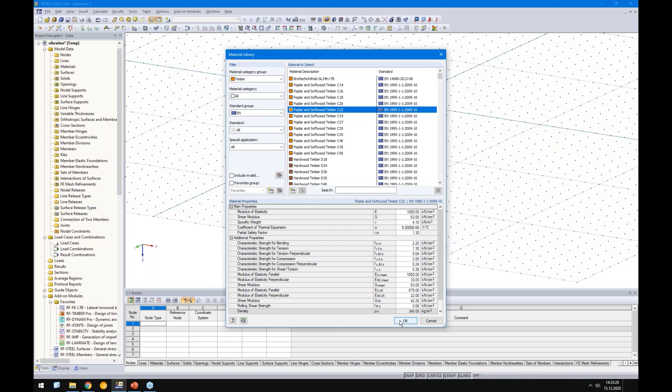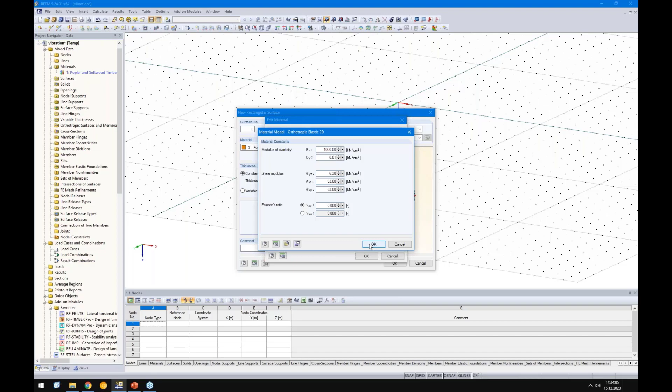I click OK. The height of the timber is 200 millimeters and the concrete is 100 millimeters. So I enter 200 millimeters, and of course it's an orthotropic surface, otherwise I will get an error message during the analysis. You see we have the X direction with a strong E modulus and the weak one in Y direction. We can directly set it to 0 because in the hand calculation no stiffness was considered from the timber. There's a tiny stiffness, but not much.

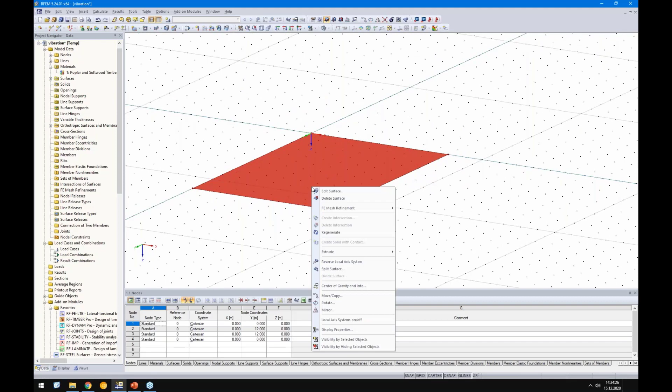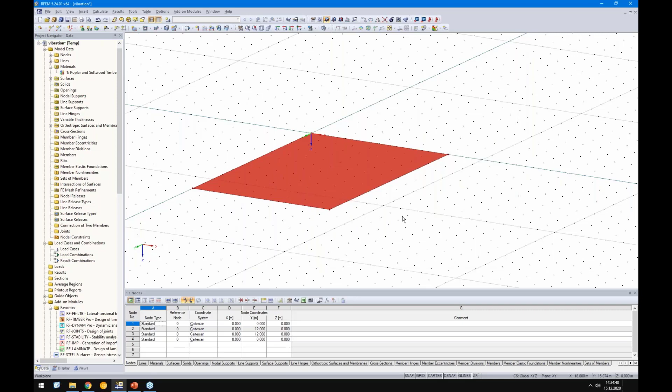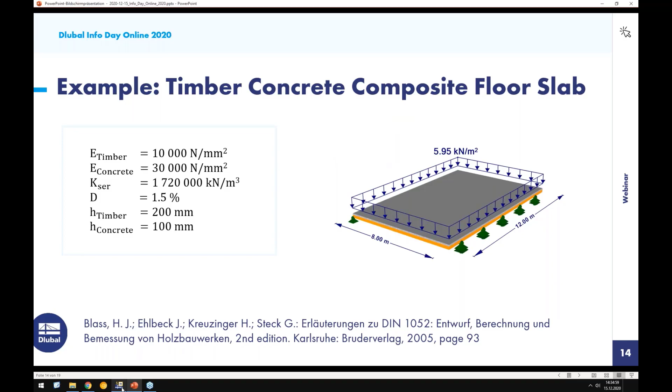It has 8 by 12 meters. Let's double check, 12 meters and 8 meters. Then I will copy this surface and create the concrete. The thickness was 20 centimeters and 10 centimeters, so we need to lift up the concrete surface by 0.15 meters from center to center. We need a new material here. They used 30,000 newtons per square millimeter, so we use a concrete with about 30,000, a C20/25. But it has only 100 millimeters, so we switch this to 100 millimeters.

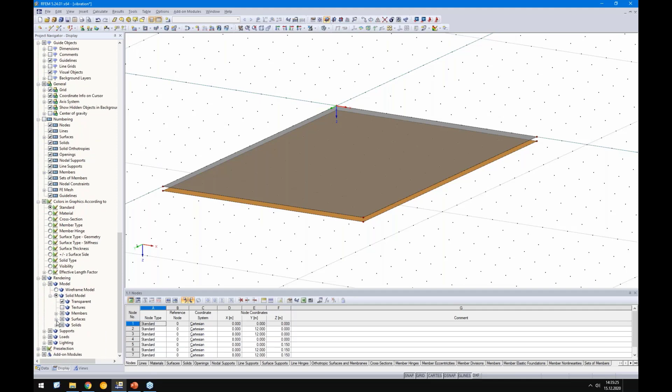Afterwards, let's check if everything is correct. We activate the thickness for the surfaces, and when we zoom in, we see the concrete from here till here, and the timber from here till here, which looks fine. Now we need to connect the concrete slab with the timber slab. I will show the possibilities on two examples; we have two ways to do this.

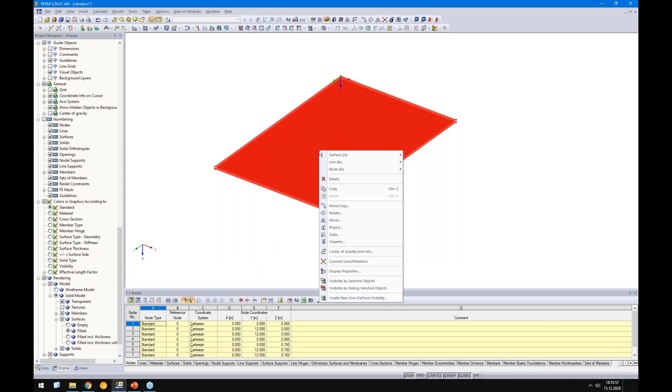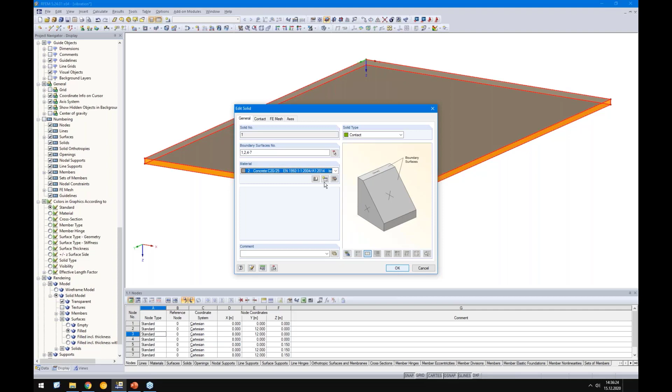The first way, I start with a contact solid. I select these two surfaces and say create solid with contact. You see directly we get some boundary surfaces. These have zero stiffness because they get the stiffness from the contact solid. We will define this contact solid and select the contact surfaces, surface 1 and surface 2.

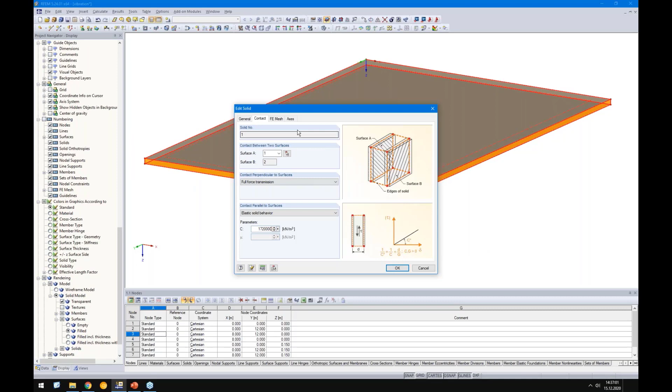Perpendicular to the surface, we want full force transmission, and parallel to the layers we want elastic behavior, and the spring was 1,720 meganewton per cubic meter, which we enter here. We are in kilonewton, so I add three zeros. Let's double check: on top we have the concrete, maybe better to select standard here, and on the bottom side we have the timber. Good so far.

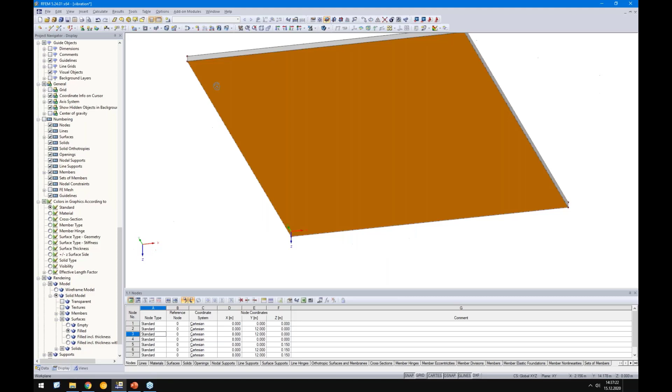We will support the slab. It's simply supported on this side and on this side. In X direction, I will also consider a tiny spring to keep it stable, otherwise there is no support in the XY plane, and with the springs I fix it. I fix this structure, but since we do not use any load in XY plane, we'll use only the mass in Z direction, perpendicular to the surfaces.

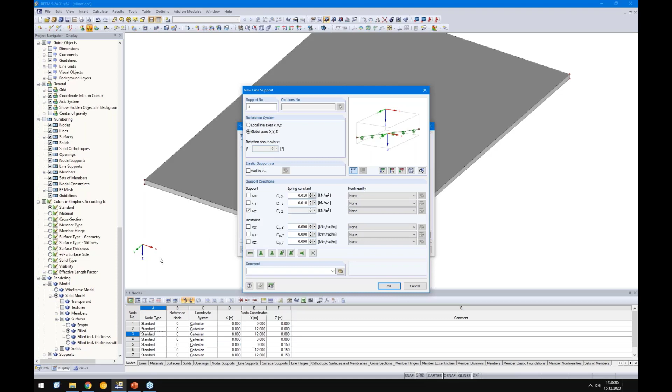So this line and this line. I will add a load case. So load case 1, that should be the mass. The self-weight is already included in this 595 kilogram per square meter.

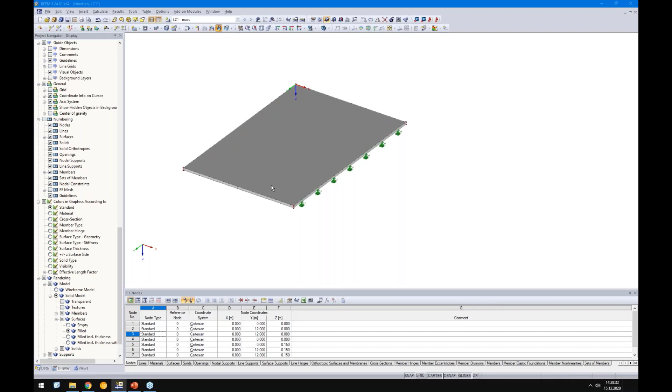So I define here directly the force of 5.95 kilonewton per square meter. And let's take care of the FE mesh size, so maybe we will switch to 0.2 meters, which should be absolutely fine for this example.

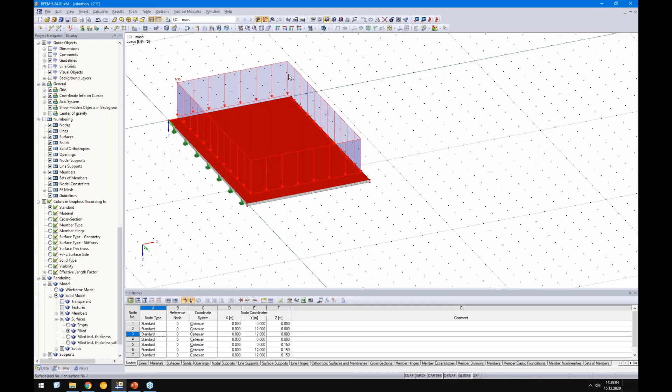That's one option. I will show you the second one. For the second one, I will copy the surface via drag and drop. And in this case, I will use the element surface releases.

I will create a new one, a new surface release. I want to release another surface. So you see here how does it work: we have one solid or one surface and another solid or another surface, and in between there should be this hinge information or this release information.

Here you see we have an advantage because we can control both directions independently. The contact solid, there is only one direction, so X and Y is always the same value. Here we can distinguish, but to compare the results, I will use the same as for the contact solid.

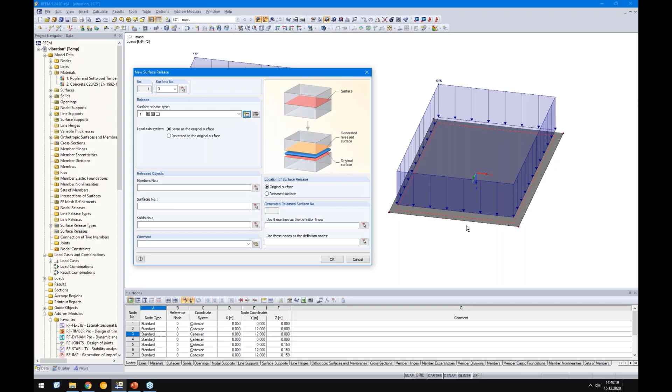I can release the object here, the same what I did with the line releases, but there is no element until now what I can release, but it doesn't matter. I just click the OK button, and when I click on the surface, you see there is already a surface, and this surface I will add it. It's a zero surface, but no big deal.

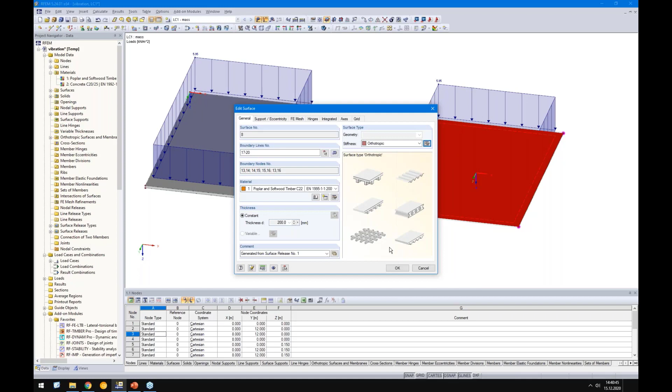I will switch over to orthotropic and I will assign this timber surface. I just need to adjust the thickness of the timber by 200 millimeters. And now I need to set this concrete surface, or I need to create an eccentricity for this concrete surface by minus 150 millimeters.

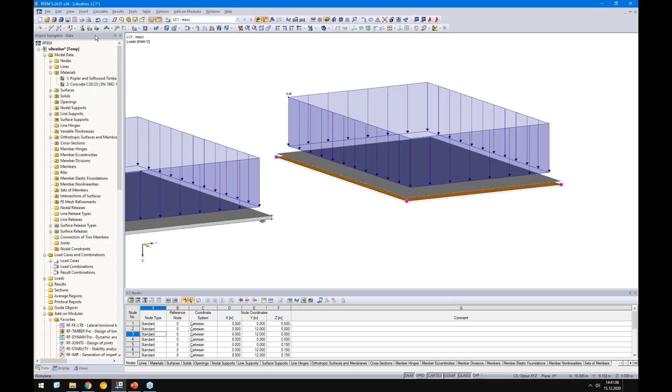Now I have the same model - oh, not the same, I forgot the supports, so on the left side and also on the right side. Okay, let's run the analysis for load case 1.

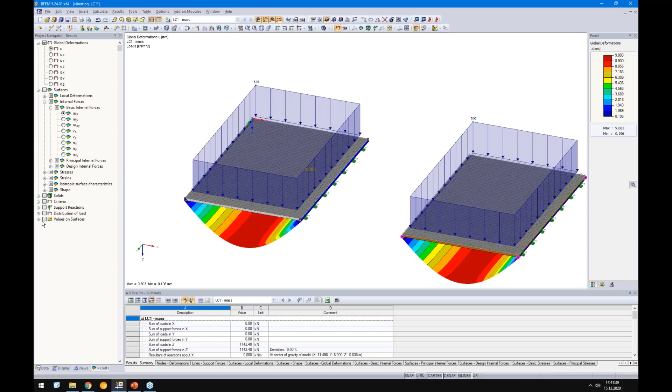Meanwhile, we check what is the solution from the analytical equation. From the example, it is 9.5 millimeters. Let's go back and see the result. Yeah, it's good, but it's still a bit away from the 9.5 millimeters. But you can see it here in the center, we have already the 9.5 millimeters, but not here on the outside.

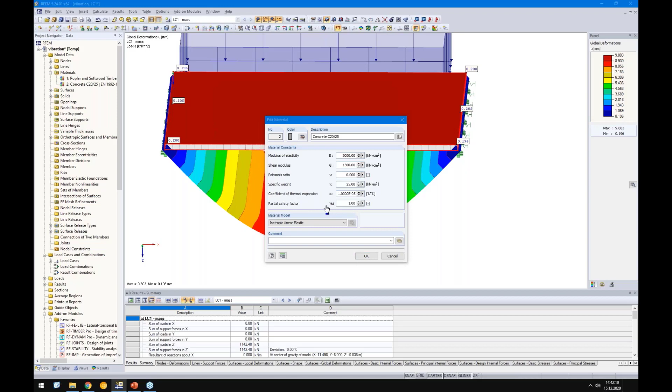It comes because of the concrete and the Poisson effect. Of course, in the hand calculation or in the analytical equations, this Poisson effect is not considered, and therefore I will neglect it here too. I set it to 0. Then start again.

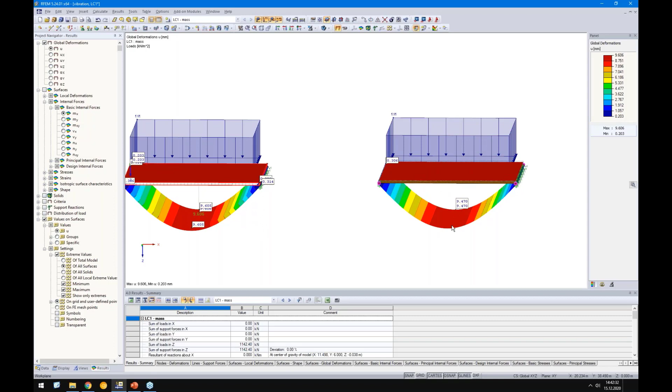So we had 9.5 millimeters. We have 9.6 now here, and we have 9.47 on the right side with the surface releases. So it fits perfectly with the result from the analytical equation.

So they write here, okay, it's bigger than 6 millimeters, and therefore the eigenfrequency of this structure is lower than 7.2 hertz. This was the limit in the old German timber code, and the new limit in the Eurocode is 8 hertz. But there is always a relation between the deformation and the eigenfrequency.

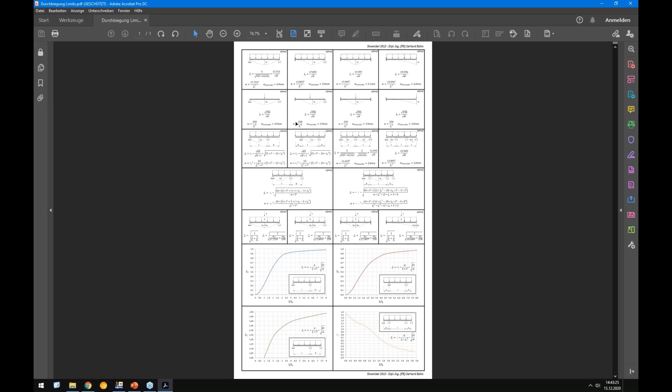I did a small article about this issue, it's explained here. When you go to the knowledge base on our website, you will find this information, and inside there is a PDF file what I have created a few years ago, 2013 already. And here you can see the relation for a simple one-span beam.

The relation is this equation, maybe this is well known from literature. So for Eurocode 5 and the limit of 8 hertz, we have around 4.9 millimeter. So if the deformation of this one-span beam is lower than 4.9 millimeter, the eigenfrequency is automatically higher than 8 hertz, or 8 hertz exactly.

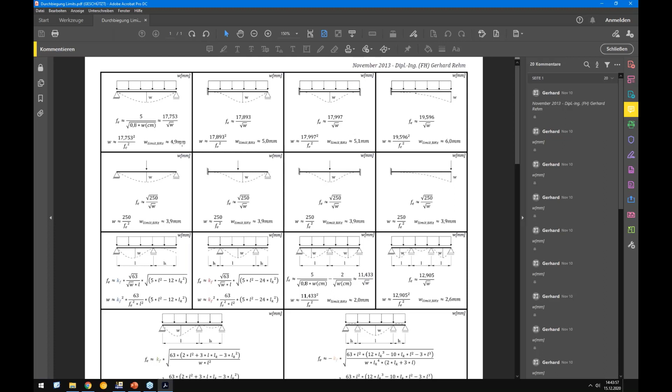And in case the deformation is bigger than 4.9 millimeter for a one-span beam, the eigenfrequency is smaller than 8 hertz. That's just a simplified rule. Okay, good.

Let's go further and check the natural frequency. In this case, it should be 5.87 hertz. It's really low, and they write that some additional design requirements are necessary, the same as in Eurocode 5. But Eurocode 5 does not provide any information when the frequency is lower than 8 hertz. There are some literature and approaches on how to deal with it, from this code or from the source I mentioned, or from other literature.

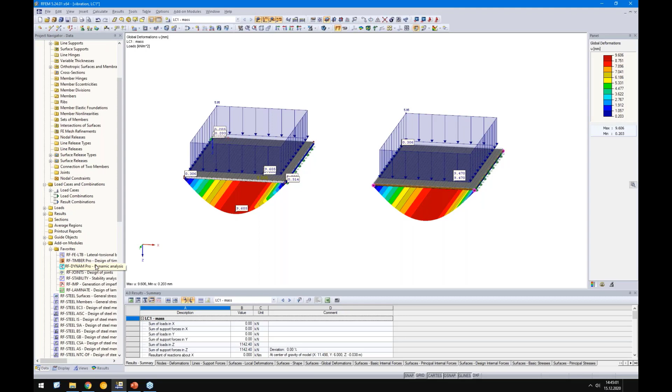So let's check the eigenfrequency. We cannot check it directly in RFEM. We need an add-on module called RF-DYNAM Pro. This DYNAM Pro add-on module is based on forced vibrations or equivalent loads, especially for seismic design and so on. In our case, I just want to use the first sub module.

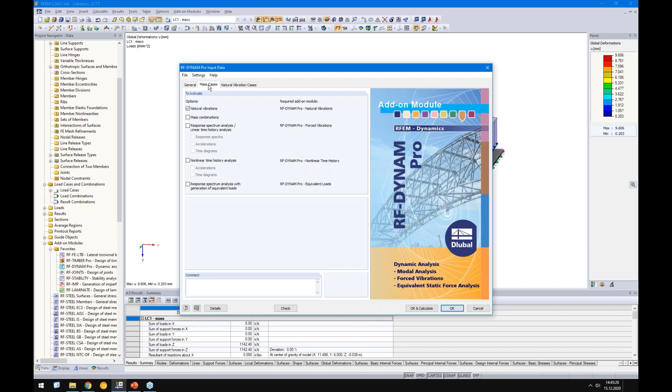There are 4 sub modules inside this RF-DYNAM Pro module. I use the natural vibration module, and I go here. I will assign my mass. In this case, I select to use the mass from load case 1.

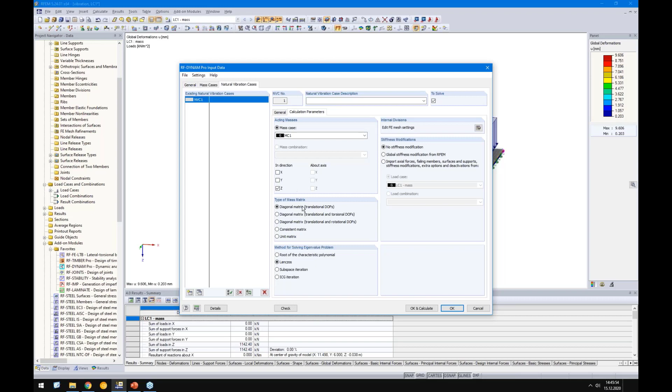In the next tab, I can select how many eigenvalues I want to calculate. Of course, I'm mostly interested in the first one. And here I say please do not activate or consider the masses in the X and Y direction, since I have no support here. I'm only interested in the Z direction. Okay, then let's calculate the frequency.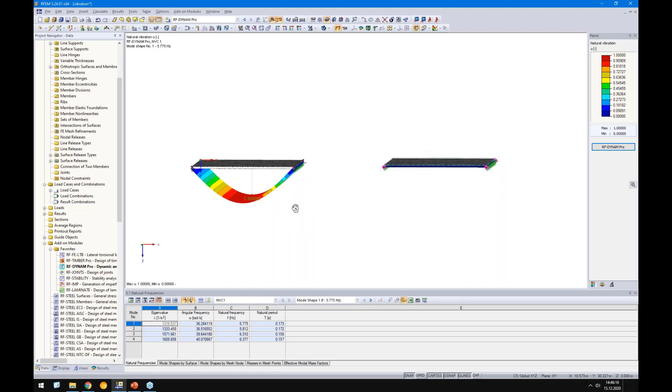You see the result here on the bottom side, and accordingly the eigenshape. Of course, for a one-span beam, I do not expect anything else. We can check the second mode, for example, on the right side. You see here the first and second mode: the first mode on the left side with 5.77 hertz, and on the right side with 5.8 hertz, which is fine since the approaches of surface releases and contact solids are not exactly the same. So we got different deformations, but they are close enough.

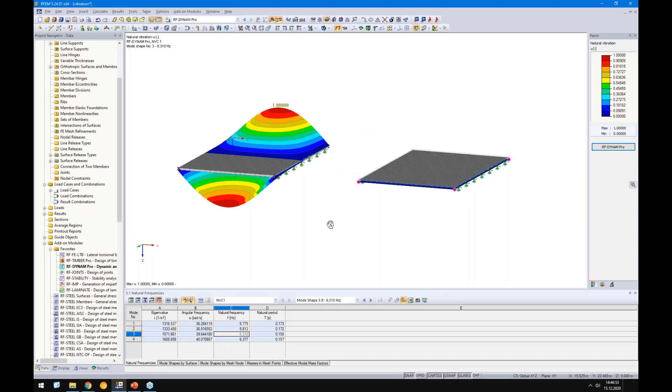For example, the third mode is some torsional mode, but I'm not interested in this mode now. I will check this one here: eigenshape 5.7, let's say 5.8 hertz. And in this literature, it's 5.87 hertz.

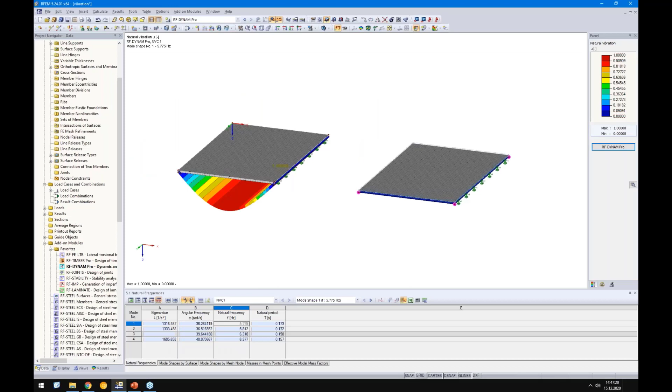That's fine. Then we need to check the stiffness under a man load of 1 kilonewton. It's actually the same as in Eurocode 5. We will do this: I will create a new load case, and I call it unit load.

I will apply this load exactly in the middle. And the same here. I add this 1 kilonewton on this generated node. All right, so we run the analysis.

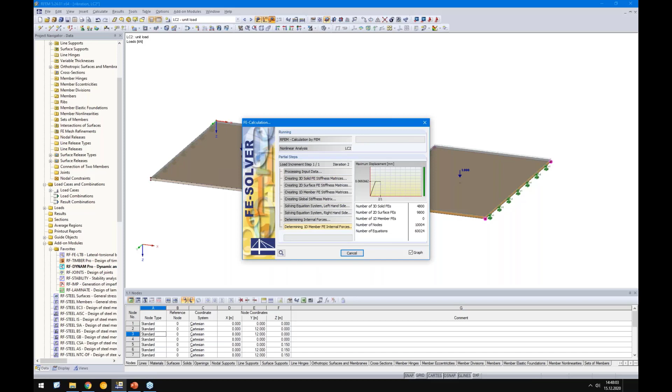We see a deformation of around 0.07 millimeters. Compared to the literature, it's a bit smaller. The reason is because they calculate the stiffness of this floor with an effective width. They do not consider the whole width of 12 meters. The effective width was, I guess, 3.8 meters in this example.

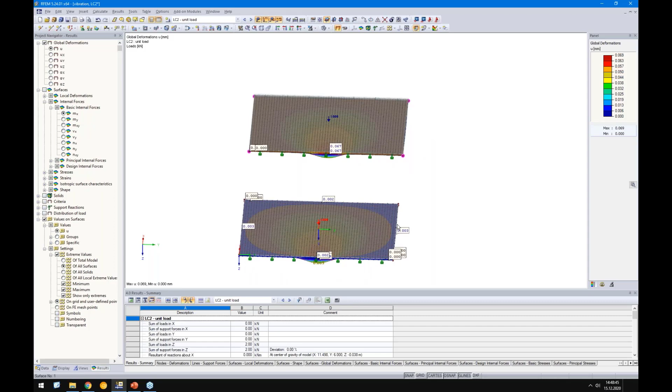So if you would reduce the width of the floor to 3.8 meters and distribute the node load to a line load, you will get exactly the 0.083 millimeters. So in this case, this is a bit too uneconomic, but it's not far away, so it's okay.

Okay, and the next step was the acceleration design. Because our frequency is smaller than 8 hertz, we need to check the acceleration.

Empirical investigations in the 80s offered the result that vibration with frequency lower than 8 hertz is dependent on the acceleration, and with higher than 8 hertz, it's dependent on the velocity. In this case, we are smaller than 8 hertz, so we will check the acceleration.

There are tests showing that this velocity check, what is done in the Eurocode, actually is not really design-giving anymore, because a typical timber floor is, for acoustic reasons, already really heavy, and the weight is really high. Therefore, the velocity check mostly is never controlling and not important. But the acceleration needs to be checked.

Let's check how we do it by our hand calculations or by some analytical equations. Maybe you know these equations already, or you've seen them in some literature. We have the acceleration A, and we have a force divided by some mass. This is the force here, and this is the mass, and this 2 times D. D is the damping. This comes from the magnification function.

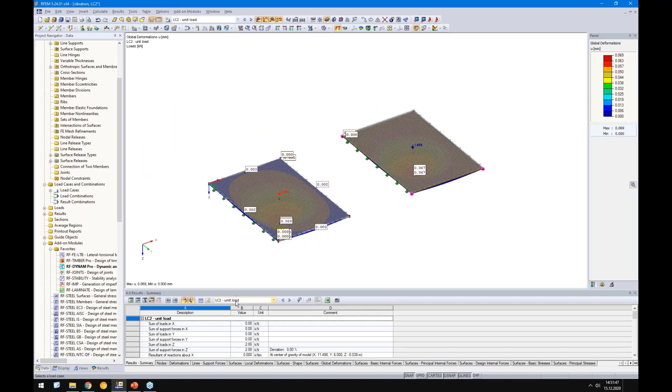Exactly this I want to consider, I want to define in our RF-DYNAM Pro add-on module. All right, let's go back, or before we go back, maybe we can switch to Dynam Pro. No, we cannot.

We need to restart the analysis again because I want to copy already the natural frequency, because I need it in the module. In this case, I need the angular frequency, omega. So I copy the first one.

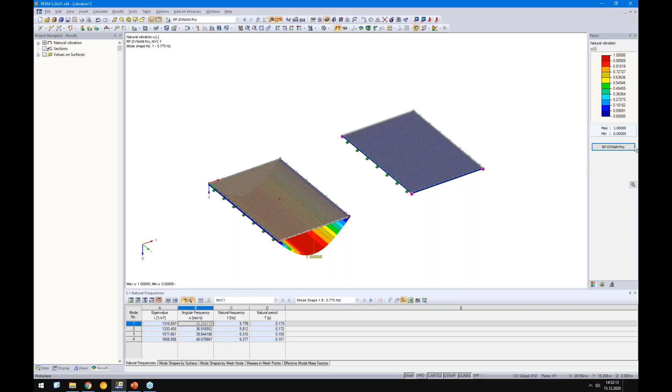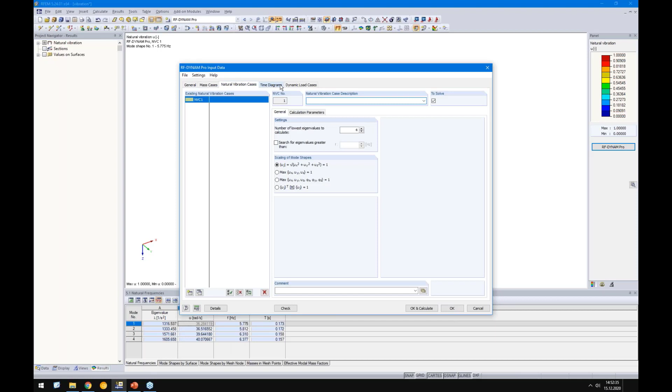And then let's go to Dynam Pro. In this case, I need to activate this response spectrum analysis option, or in this case, it's actually a time history analysis with a time diagram. So I can skip the first two tabs because they are not important for it.

Here I need to define this function, and I copied already this omega. And this omega I have to enter here. So this is actually a resonance check.

So do not enter the angular frequency of a person. When you walk around, you walk with around 2 to 2.45 hertz, and 2 times pi times the frequency is the angular frequency. But do not use the angular frequency from the person. What you need to do, that's why it's called resonance check, is enter exactly the angular frequency from the first eigenshape to get the resonance.

The shift should be 0, and the multiplier I write down just a 1 for now, and you see this periodic function, which is fine. But we need to consider the force, the correct force.

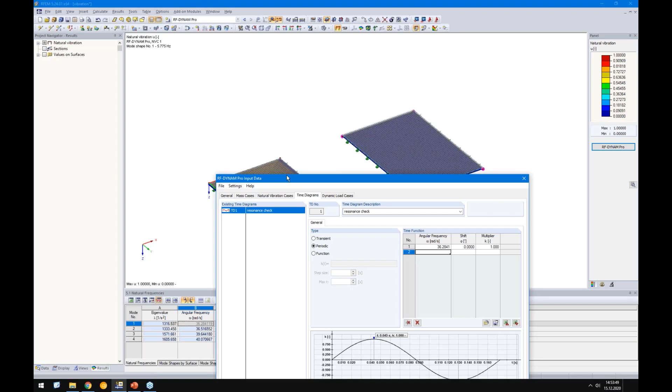We remember in load case 2, I have defined this unit load of 1 kilonewton. So when we check the force here, which is here on the upper side, we have 0.1 times 700 multiplied by 0.4, equals a factor of 0.028. Let me double check this in my notes.

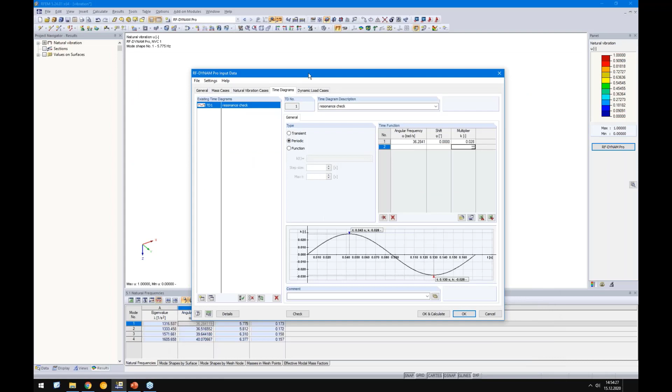Yes, it's correct. So when we multiply this factor by this 1 kilonewton, we get exactly the same force as it's written here. That's actually all for this tab. Then we switch over to the dynamic load case.

We will do a linear modal analysis, and here I can connect this unit load, this 1 kilonewton, with this time diagram. I can use this factor here too and use a factor of 1 here. That's also possible, but it's okay now.

Very important are the time steps. They should be small enough to cover all important load steps or time steps, and long enough to cover the resonance. So you need to play a bit around with it. Start with one value and then see in the results if resonance occurs already or not.

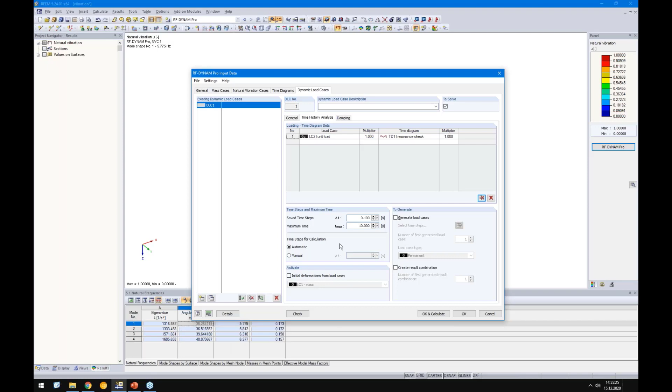And at least we need to define the damping, and it was given by 0.015. I guess that's all.

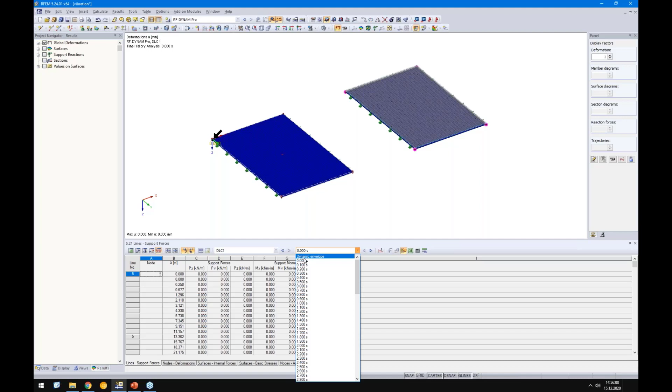Okay, I need the calculate button and let's check what result we get. We get 0.064 meters per square second. So 64. Now we get the result from the dynamic load case. And here we get the result from each time step till 10 seconds. But I'm interested in this dynamic envelope, which considers all of these time steps.

Okay, and here I will switch to nodes accelerations. So we know this node is number 17 and this node is number 18. Okay. All right, so in this example, it's not exactly the same, but it is okay. We get 0.032 when we compare it with the result from the analytical equation. We get only 50% of it, and exactly 50% of it.

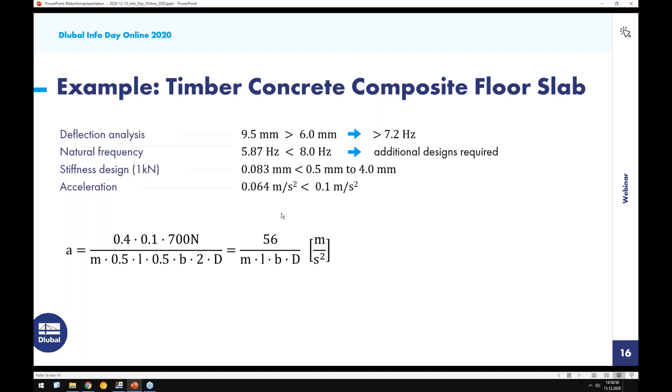When we think about this equation here on the bottom, what they have used in this example, they think about a four-sided supported slab. As you see, they estimate half of it goes into these supports and half into these supports. So what we need for our example is actually this one, because we use it as a one-span beam. So they have mixed it in this literature a bit. It was a bit confusing at first, but I figured this out in the end.

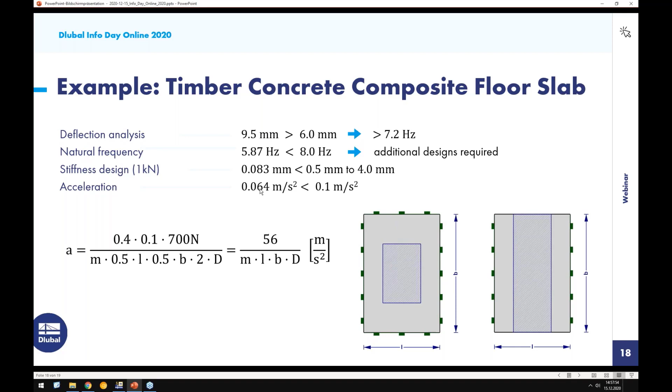And if you reduce, so this is 0.5 by b. So if you neglect the 0.5 by multiplying the whole equation with 0.5, you multiply also this value with 0.5. So you will get exactly the 0.032 meters per square second. So this is the way to check it.

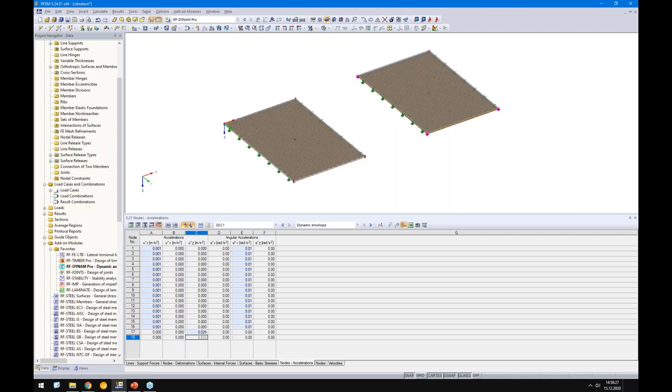And of course, you can add the supports here and here, so supported on four sides, and run the analysis, copy the angular frequency again, insert it in the time course monitor, and then you will get exactly this 0.064 meters per square second. But this is your homework, and for me that's all from today, and I hope everything was clear with this approach and with defining the contact solids and the surface releases. It's a mighty feature.

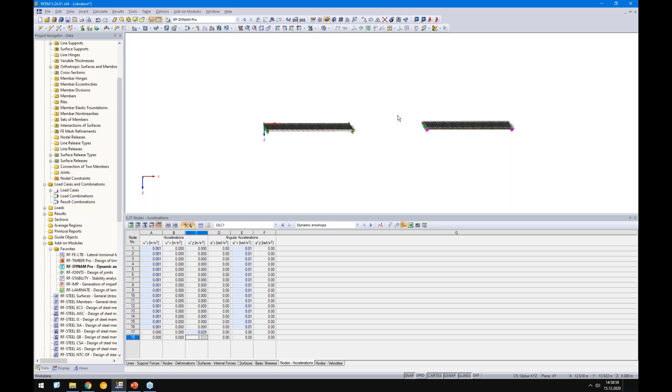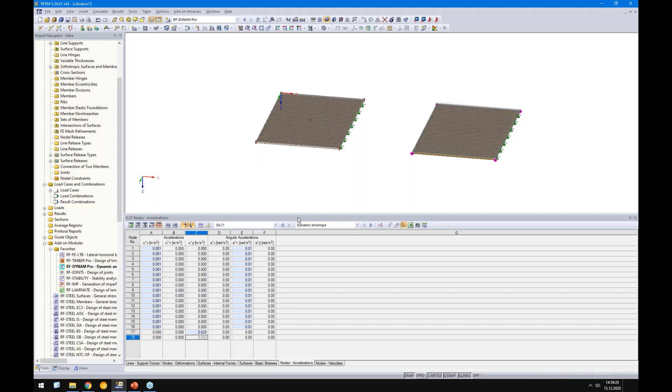Of course, for this slab, maybe I would not use this DYNAM Pro add-on module when there is an easy, simple analytical equation where you are much quicker. But in case of some complicated structure, or consider you have a downstand beam here, so you have no rigid support, you have a semi-rigid support, and then it's getting really complicated to get these accelerations with analytical equations.

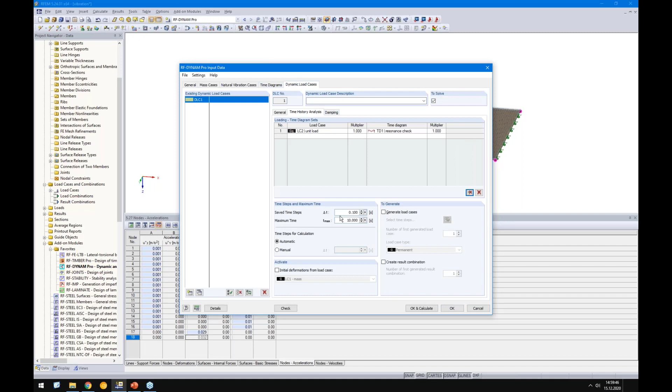Maybe one thing I want to show you is this time course monitor. I want to check the acceleration in Z direction for node number 18. And okay, you see here, maybe the time step was not small enough. Maybe we should add another 0 here. I will do this quickly to get a proper result. We saw that the function was not really homogeneous. There were a lot of peaks and so on. I increase the increments here, and then let's check.

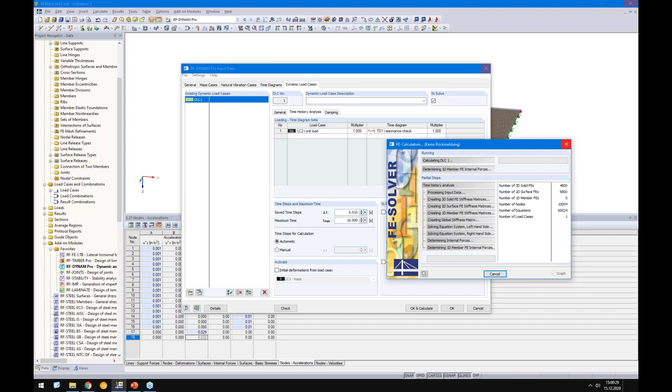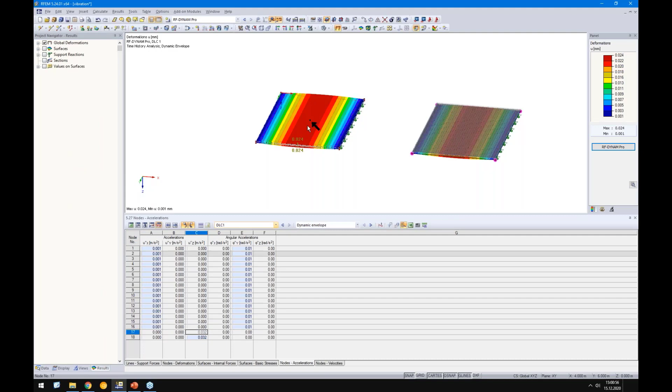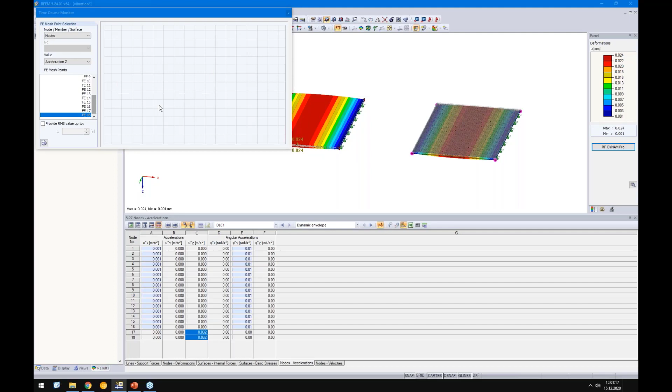Of course, the more time steps you use, the longer the analysis takes, but we'll see the result. Still loading. Okay, so you see, it was the same result. It does not change, only for the contact solid. Now we get the same results for both because of smaller time steps. And when we check this time course monitor, hopefully we get a better curve. Looks good so far.

So you see here how this resonance starts, and the peak is here, and the next value is already 0.01. So this value here is already smaller, so it will fall down here. So resonance is here at around 9.95 seconds. So I catch it really well with the 10 seconds. So you can evaluate all the results from velocity and acceleration inside this time course monitor.